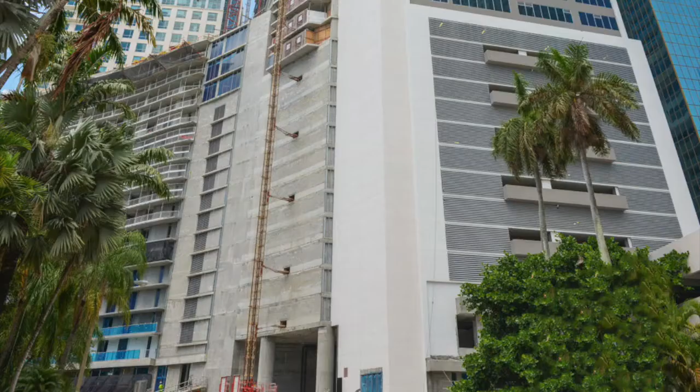We want to be able to satisfy their wills and wants in terms of, socially, their work and play condition.

In Panorama, since it's multi-use, people can stay here and really not even go out. They can work here like I do. I work across the way at 1101.

What I was getting at is we have 1,800 people, 821 apartments, and somewhere in the neighborhood of 250 to 300,000 square feet of office and retail between the annex of 1101, which is part of the entire complex.

And here's where people work and live. I am one candidate that works and lives here. To go ahead and design so that people live comfortably under this mega block is somewhat of an accomplishment.

Because the future of our cities will be somewhat designed under this concept, where it's self-sufficient and we avoid traveling from one city to another or long distances. The use of the automobile will be somewhat curtailed. This is something that's somewhat accomplished with the Panorama project.

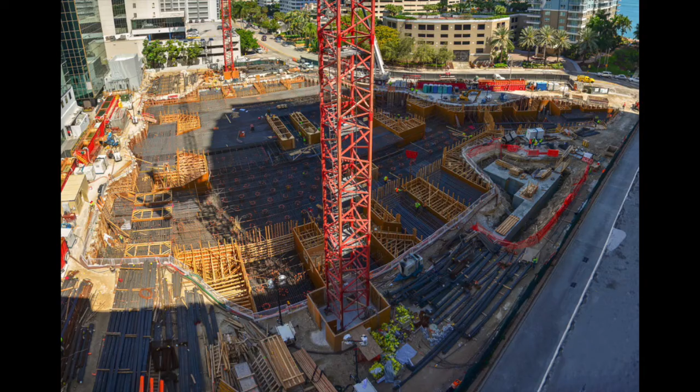I can tell you how it was conceptualized and how it started, but basically it's kind of complex, because buildings that are privately owned must match a certain budgetary restraint. When you do a building that is institutional or government owned, you have a certain budget, but there's more freedom, because a private project such as Panorama, 1101, and this complex has to make money.

We live in a capitalist society, and this project, they put in well over $600-700 million so it can provide a good profit, and that's the way it is in America. Yeah, it takes away the poetry.

Right, and if an architect or a structural engineer, for that matter—Danilo and I had many discussions back and forth about reevaluating, re-engineering, value engineering some of the elements of Panorama—it's because it had to come in within a certain budgetary means.

Yeah, yeah, indeed. And what I can try to do, maybe, let me see if it works. I have a presentation that I used previously on Panorama, so it has some graphics that we can connect the words to. Let me see if I can share the screen. Just tell me if you see it.

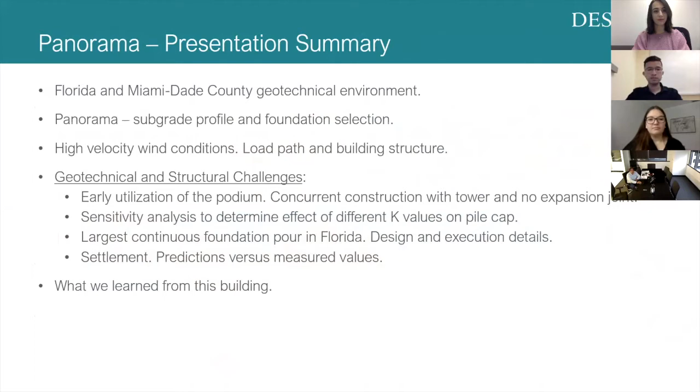Now, to do this kind of high rise, part of the problem is what we have in our soil. As you know, all these high rises are on Auger cast pile. You need to grab competent soil, which you can find going like 100, 120, 130 feet under the surface. That's what we did with Panorama. Panorama rests on Auger cast piles, and this is the location of Panorama, highlighted here.

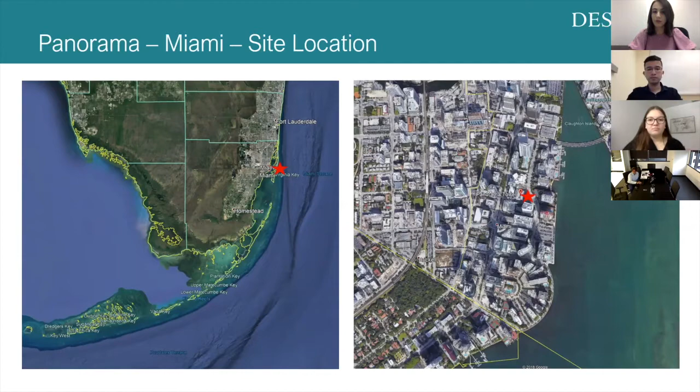Obviously, for you it's not a problem, you know where Miami is, you know the proximity to the water. So this is basically what we consider, that you have this limestone. One of the first steps when you design a building is to understand what is the soil condition, and that's what we did.

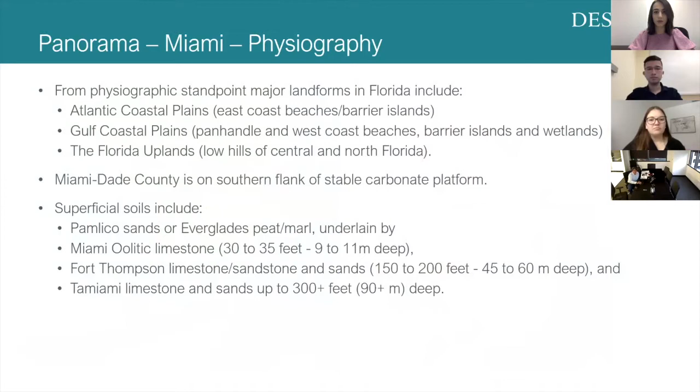So you get a geotechnical report. The geotechnical report is based on investigation, and those investigations give you the local rocks that you will rest on. So this is basically the concept and pictures of what you will see under the surface of Panorama. And at a certain point, you use Auger cast pile, which is the most economical and best way to reach the depth that you need.

Now, what is the limit of Auger cast pile? The limit is that those are no wider than 30 to 42 inches. They go to a depth of 150 to 160 feet. That is where every tower that you see around, like Miami World Center, Lateral, the Aston Martin going up, 1000 Museum, they all have piles that go to this depth.

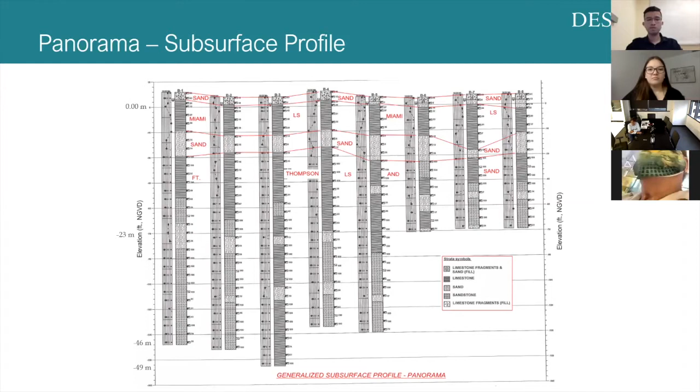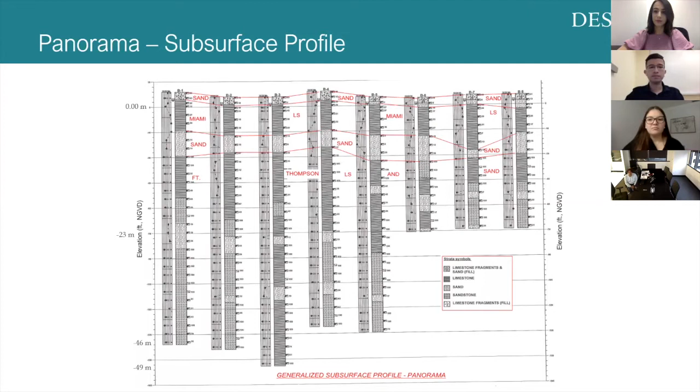This is what a subsurface profile looks like. This is the one for Panorama. So what you're seeing is that you have sand close to the surface, and not very competent lime rock going a little bit under the surface. Then again, sand, which is sometimes a problem because you have piles that tend to be shorter, the ones that support buildings up to, let's say, 14, 15 stories.

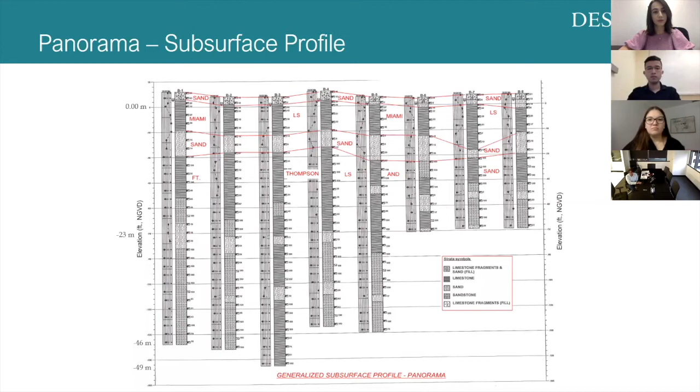So you may get into the problem of having piles with a lot of settlement. Then you go basically into more competent soil when you go deeper, and you keep going down until you have the required capacity for the pile, which happens to be at that depth. Now, one thing that is important to consider is the displacement of the pile.

When the pile gets loaded, it has a displacement, and that displacement translates to the displacement of the building. Based on that, you estimate a settlement of the entire tower. In this case, the settlement was estimated at 3-4 inches.

Like often happens, this building at the old Panorama settled 6 inches, more than expected, but it was designed to be resilient, so we anticipated the fact that it could settle more.

So what is Panorama peculiar? I know there was a question about the frequencies of this building. Do you see the mouse? You have a component of wind that goes in this direction, a component of wind that goes in the perpendicular direction, and a tendency of the building to have torsion.

This building was stabilized to be fairly rigid for its height. The period is 5.7 seconds in one direction, and 5 seconds in the other. So the building is stiff in both directions, and torsional is the third mode, which is the stiffest, requiring the most energy to move the building, about 4.2 seconds.

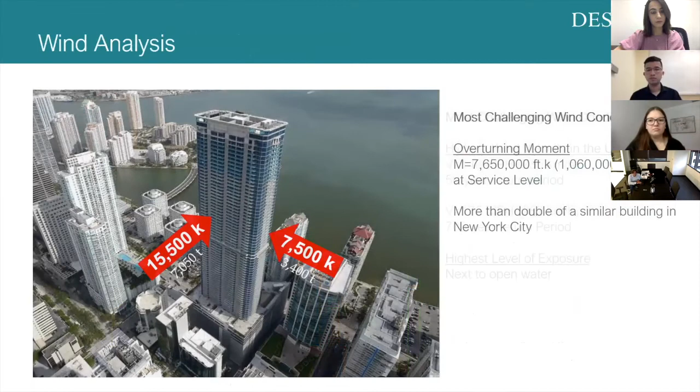Moshe, do you want to say some words on the building, on the picture, before I show some foundation? I see you're back and safe. Oh, I think, yeah, your microphone. Hello. Yeah.

Danilo, what is it that you want me to review? I mean, you have basically the building that has a certain shape, certain prominence, and a podium. I think what I would like to know is how the big elements go together. Like, for instance, why the podium is like this.

I can give you an idea how the puzzle began. Previously we had a parking structure and the two buildings of 1101 sitting on a piece of property that is about, let's say, for argument's sake, 400 feet irregular by 400 feet, okay? Which is approximately close to 4 acres of land on Brickell, to which half of it was occupied by the two office buildings that face Brickell, okay?

There was a third structure, which was the parking structure of 9 floors that occupied the east side of the property facing Brickell Bay Drive. Okay, that remaining piece of property, once the parking structure was demolished, had a certain shape. And the shape on that 2 acres allowed me to restore the parking that I had removed and add the additional parking that I had to provide for the Panorama Tower. So I had to put back the 700 some odd cars that I had removed temporarily, placed on another piece of property that Mr. Hollo owned, and provide new.

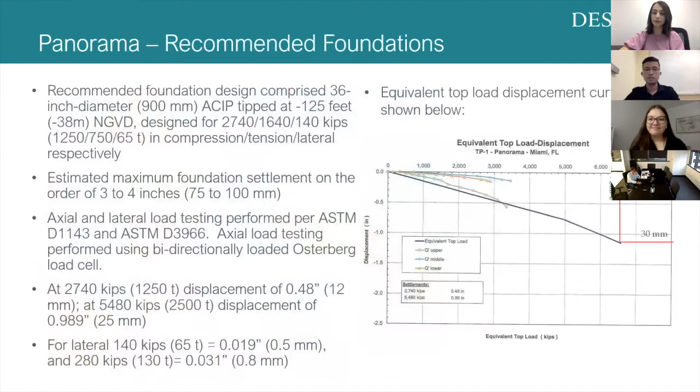And the building's stresses get displaced at the parking levels. Now, in the old days, you would have to put beams to take that weight and displace it towards the side, like a buttress. But the way this building has been designed by DeSimone, it allowed me to be basically beam free at the parking level, so I could have my driveways be operative and functional without having a drop beam that will carry the load.

Yeah. So you want to tell this kid the real story, that you were taking out the columns and I was putting back the columns. Right. I mean, listen. Okay. That's what we architects do. We try to fight with the engineer. Says, no, I cannot have this column in the middle of the room. You got to move it over.

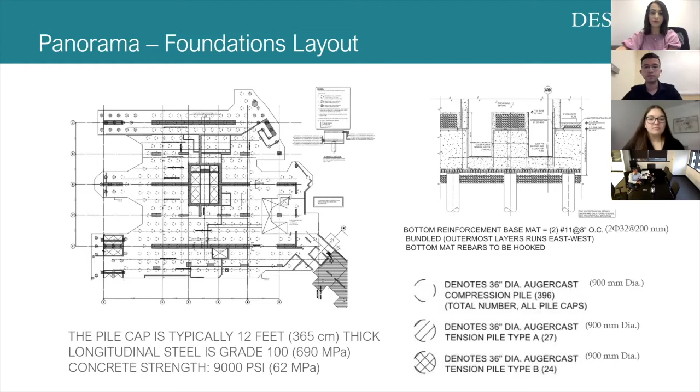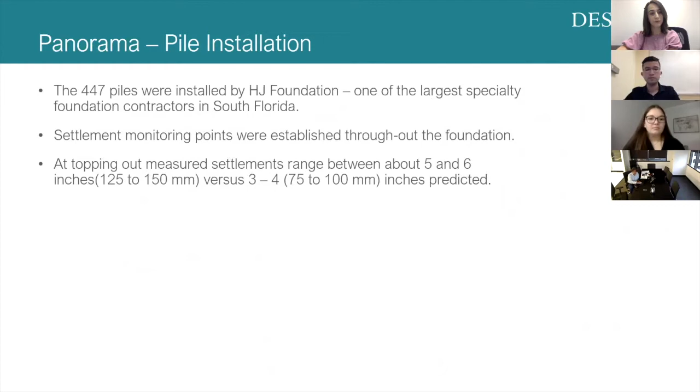So in order to go to grade 100, we had a discussion with the city and with the peer reviewer, which is a company that reviews our drawings, and we basically had a performance-based design, meaning that we proved with records of the tests of this steel that much tension was achievable. Now, some numbers, 447 piles, and this is basically the discussion.

Now, on the settlement, this is what it looks like when you have the big hole, and you're working on filling the hole with the piles, and it's huge. It's huge because it's a lot of concrete, a lot of water that may go into that hole. So there is all the preparation, and also there is a need to basically retain the soil with sheet piles.

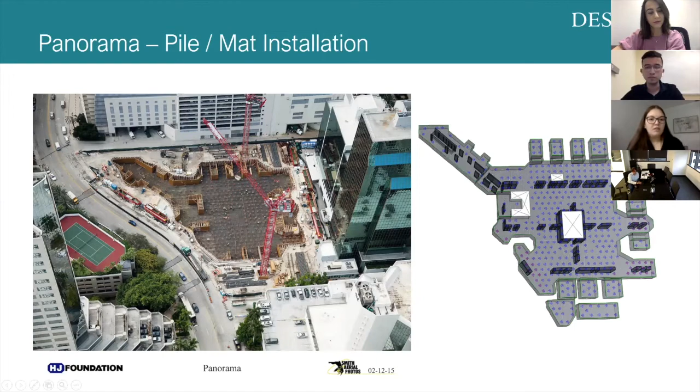Now, things keep going, and this is what's happening. You start building what will be the area where you have the elevators. This is the analysis that you see next to it. You see most of the main pile cap is connected, so as not to have differential settlement. And then when you go into the real deal, this is about 13,000 cubic yards. It's huge, 600 workers. And it's basically continuous.

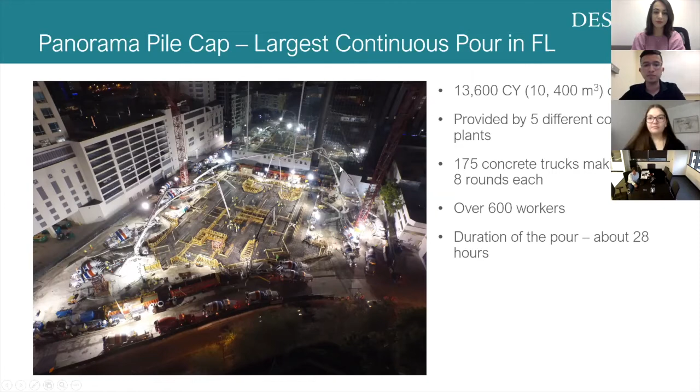Now, a lot of projects in Miami claim to have the largest continuous pour, but this is within 28 hours. It's been huge. And so I would say so far it's not been surpassed.

Now, if we want to be a little bit cool in engineering, we did for this project, just to make sure that Moshe doesn't have to suffer the problems that come with settlement, a sensitivity analysis on piles. So what happens if the piles are a little bit stiffer or less stiff than what the geotechnical report will give you? So in a building of this caliber, there is a tendency of softening of the foundation exactly in the center, let's say under the core.

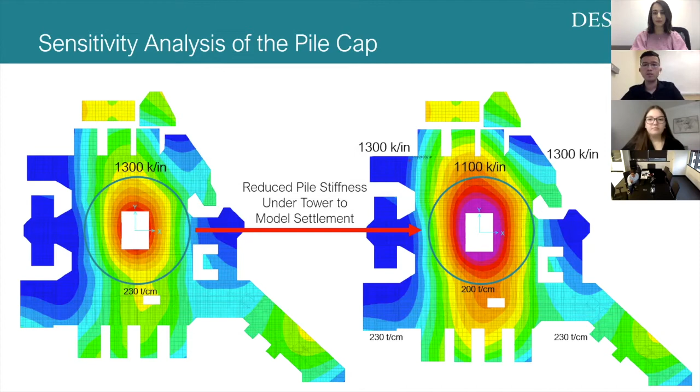So what you have in the geotechnical report is 1,300 kips per inch, so it takes 1,300 kips to lower 1 inch. In reality, it could be less than that. It could be only 1,100 kips. What it means is that when you run the calculation, there may be more deformation under the core, which doesn't change what happens on the pile.

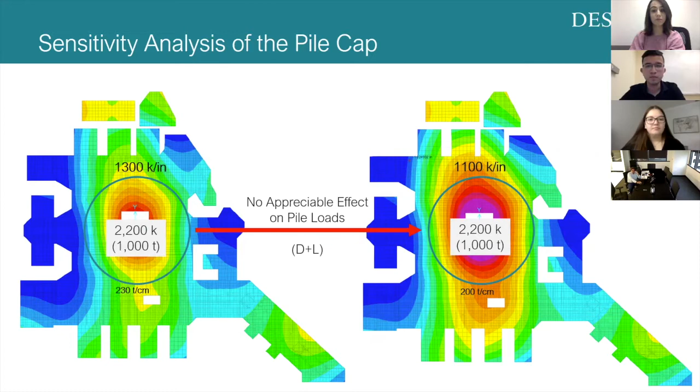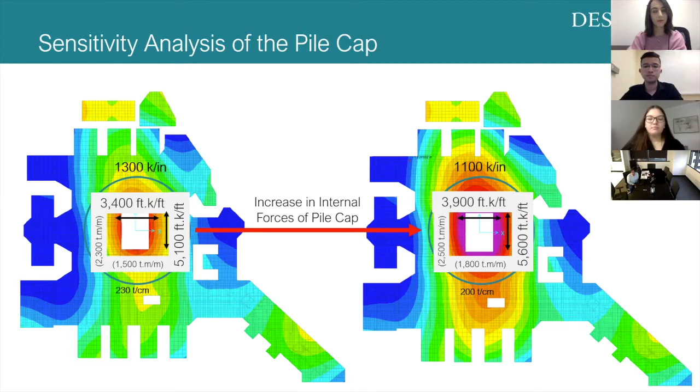The piles tend to receive, because they are designed by equilibrium, statically, basically the same load, but the deformation is different. Therefore, it imposes a load in the pile cap, which can bring substantially different forces, and it translates into a need for additional reinforcement, which means that if you just do the calculation for a pile cap without considering this kind of effect of softening, which happens with time, you may end up being short on reinforcement.

So you will have an area that you can call a compression zone, and an area you call a tension zone, that basically will give you a need for additional reinforcement. So you will have to envelope the results that you get with piles that are a little bit stiffer and a little bit softer than you originally designed. That could bring additional reinforcement needed that could prevent cracking in the pile cap.

Now, a pile cap of that nature typically doesn't fail in moment or tension. It fails in shear. But it is not a good thing to initiate cracking of a pile cap, even because of moment, because it reduces the resources available for shear. It's cracked concrete. And besides all the problems you can have if it cracks under an elevator, you can have water intrusion, or more settlement due to a not perfectly functioning pile cap.

So based on the pile cap softening and the shear force cracking, did you have to change the pile caps? Which pile caps did you end up using? The pile cap still had the same layout, the same piles. It's the top and bottom reinforcement that were enveloped. So you basically consider the range of values that the stiffness of the pile can be, depending on permanent and transient loads, which means wind.

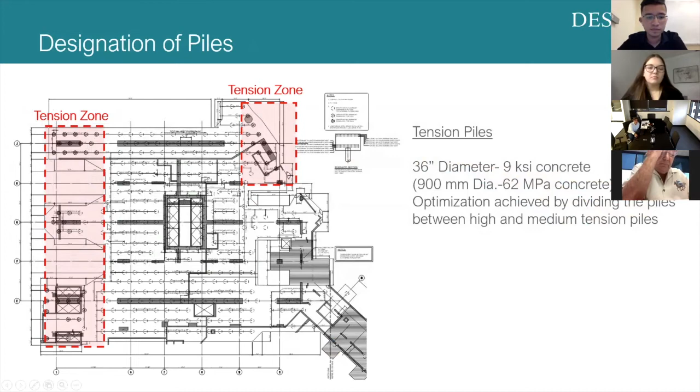So what you typically find out is that if the pile is towards the center of the building, it's softer than you think it is. If it's at the edge, it's behaving harder. So it takes more load to attend the center deformation, which means you end up with more bottom reinforcement at the center of the pile cap and more top reinforcement. Here, in tension zones, you will end up having more top reinforcement. And here, since instead of deflecting like this it deflects more, you need to add more bottom reinforcement.

So that is interesting, something that you only see in buildings of a certain caliber, but they can generate this kind of forces, this kind of compression zone, and load the piles in this way. So these piles, with time, get loaded more than what they're supposed to be.

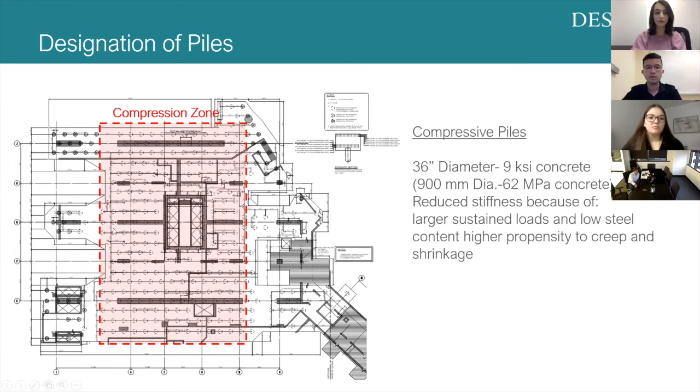For instance, here around the core, even though there is so much structure, you can really see at least 5, 6, 7% more in the load just because of the geometry. Not by calculation. By calculation it is correct, but you have to add this effect of displacement that tends to load the center more. So just to give you an idea how complicated it may get. What you see here is settlement.

Now, this is how you monitor a building. You have settlement points. You locate areas where you have sensors. They give you the settlement through the life of construction and sometimes the life of the building, and you see how the building settles. Why is that important? Because, while it's not the case for this building, a building can tilt, like we have in Sunny Isles.

A typical example is Acqualina, which went down 13 inches and is tilting as well. Tilting happens when one area is softer, and the building tends to start tilting that way. So this is another thing. When the building is not symmetrical, you try to have the piles compensate for it and carry the same amount of load, putting more piles where the building is heavier and fewer piles where it is lighter, so that on average the building goes down straight. And that's what happened to Panorama.

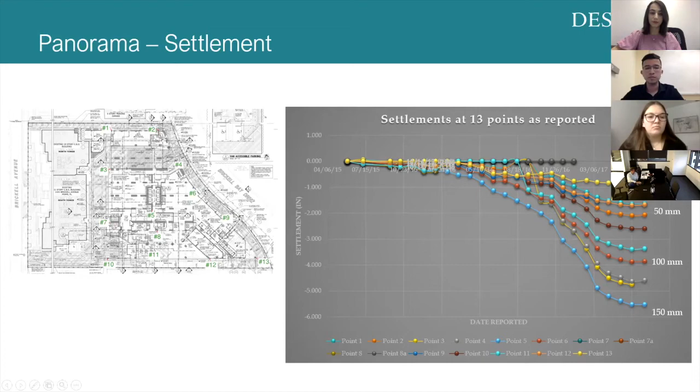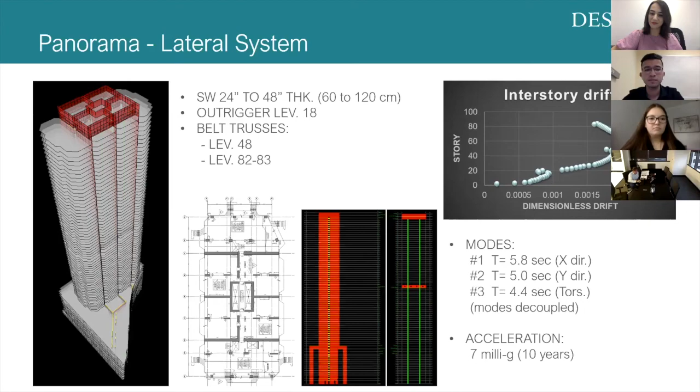I prefer to do a live presentation with some wine, prosecco, that is more interactive, more fun. But this one is the next best thing. In general, I hope that soon we will be able to sit down somewhere, with distancing. So, I don't know, if you have any question or anything that jumps to mind. Let me see. Ryan, do you think there was something we didn't cover? I don't know if Shannon maybe wants to ask one of her questions. I know we have maybe a couple that are a little bit more personal.

I do have a question for Moshe. Moshe disappeared. Okay, so I can redirect the question to Mr. Nani. What computer software was utilized in the design of the Panorama Tower? Panorama Tower, this is mostly ETABS for the lateral system, for the superstructure. When you do the slabs, use RAM Concept. When you do foundations, use SAFE. These are basically the three programs that you want to master. In this case, I would say the most important is ETABS, because once you have the forces, the behavior of the building, in a tall building, ETABS is the one that you have to really know the best. And the other two have the same importance. They are just doing different things.